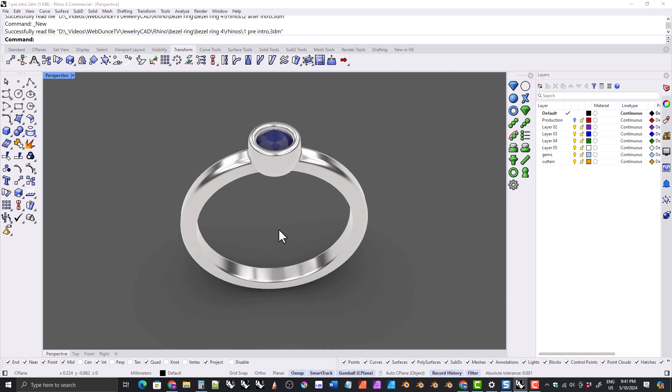Hi everyone, in this video we'll be making this bezel ring, and we'll also be making the silver material and the sapphire material. Now I'm using Rhino 8 in this video, but if you have an earlier version of Rhino like Rhino 7 or Rhino 6 even, I think you should still be able to follow along with the tutorial. There might be some small differences, maybe the location of a tool or something, but I don't think there's anything that would be significant enough to keep you from being able to follow along with the tutorial.

We'll start off by creating a new file, and we'll use the small objects millimeters template. Before we start modeling, I just want to say that we will be making this ring manually using all standard Rhino tools, but there are a few times where we could use the jewelry kit that I make. In those cases, I will show you both ways, how to do it with the jewelry kit and how to do it without the jewelry kit.

So the first thing that we're going to make is the sizing circle, and that's one of the steps that we could do with the jewelry kit or without the jewelry kit. And I'll start off by showing you how to do that with the jewelry kit. So if you have the kit installed, just click on the sizing circle icon. You'll get the sizing circle dialog. We're going to use the US system. We're going to make this a size 6. And we'll put the seam at the bottom.

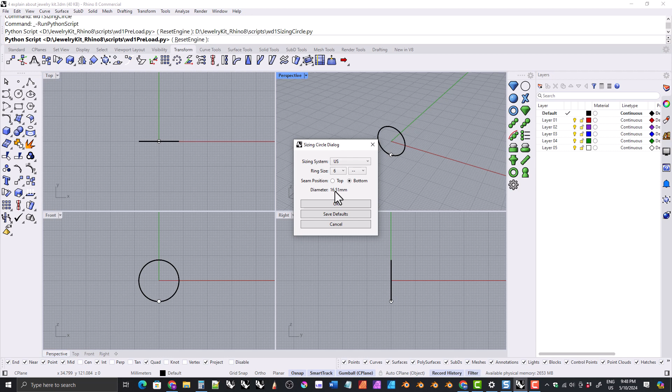Now you can see here that the diameter is 16.51 millimeters. And so we'll be using that diameter when we make this manually. Go ahead and click OK. And that is the sizing circle made with the jewelry kit. Now I'm going to show you how to make the sizing circle manually. So I'm going to go ahead and delete the circle.

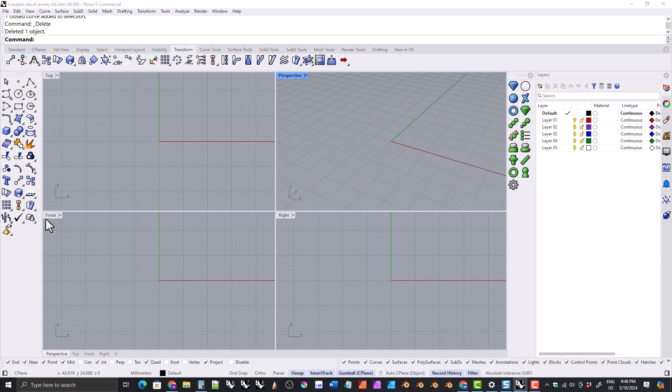And it didn't matter which viewport we were in when we made the sizing circle with the kit, but when we're making it manually, it does matter. So we really need to be in the front viewport. And I just prefer to work with the viewports maximized generally. So I'm going to go ahead and maximize the front viewport. So I'm just going to double click on the little tab here, and that will maximize it.

So we're going to come to the curve tools tab right here, and we're going to grab the circle tool. Now there are several circle tools here, but we want this one. So this one is going to ask for the center of the circle and the radius. So we're going to click on that. Up here it's asking for the center of the circle. That's going to be the center of the world. And so just up here in the command line, I'm just going to type 0 and hit enter. And that establishes the center.

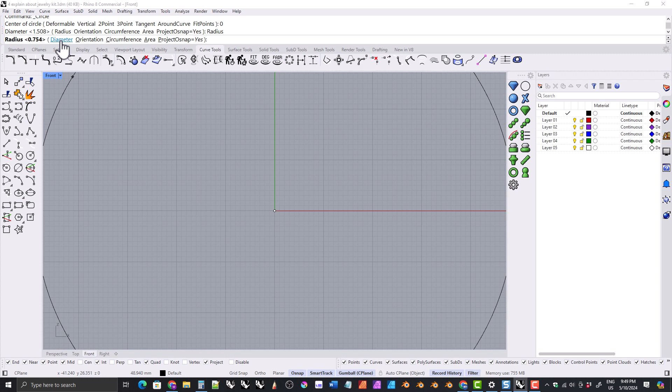The next thing that we want is the diameter. Now it is possible that yours is asking for the radius. You want to be really careful with that when you're making a sizing circle, and make sure that it is set to take the diameter. Otherwise, your circle will be twice as big as it needs to be. So if it says radius here, go ahead and click on diameter. The diameter, like we said earlier, is going to be 16.51 millimeters. So type that in and press enter.

And then we need to move the curve seam to the bottom. So the way we made the circle here, the curve seam is going to be on the right quad right here. And you can see that if you select the circle and then turn on the show curve ends tool here. And you can see this is where the circle starts and ends. Okay, so we just need to move it down to the bottom. There's a couple of different ways we could do that. This time what we're going to do is just rotate the circle in this direction.

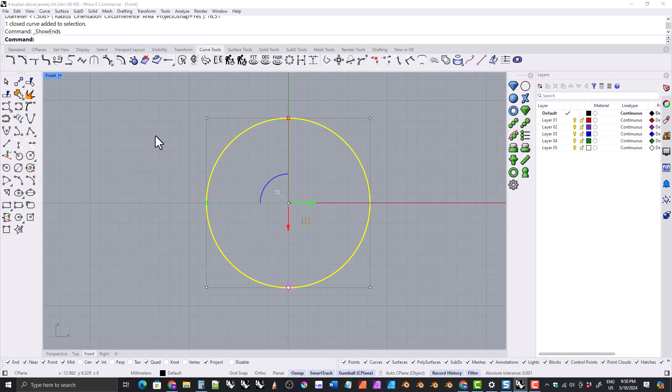So we're going to click on this little rotation handle here. And you can see that the arrows are pointing in this direction, but we want to move in the opposite direction. Because of that, we need to enter a negative number. So we want to move 90 degrees in this direction. We'll have to put in negative 90. So type negative 90 and hit enter. And you can see that now the curve seam is at the bottom. And I'm going to go ahead and close out the end analysis dialog box here. Okay, so we have the sizing circle. The next thing we need to do is import the gemstone.

Okay, so importing the gemstone is another step that we could do with the jewelry kit, or we could do it manually. So I'm going to start off by showing you how to do it with the jewelry kit. So we're just going to click on the gem loader icon right here, and we'll get the gem dialog box. We can leave the type set to fancy and the shape set to round.

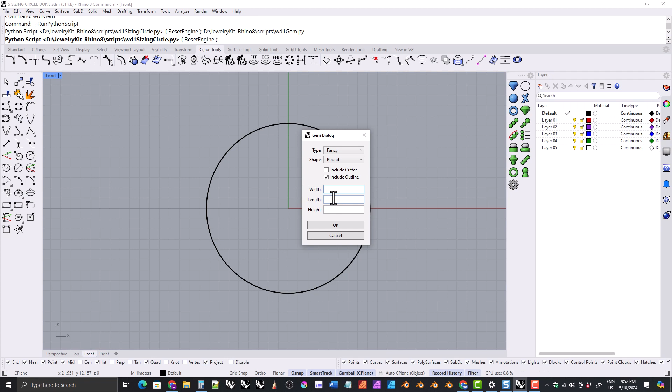We don't need the cutter, so we'll go ahead and remove the check mark from that. We do want the outline, so we'll leave that there. And then we want the diameter to be 3.5 millimeters. So we're going to type 3.5 and click OK. And you can see that it has brought in a gemstone with a diameter of 3.5 millimeters, and it has

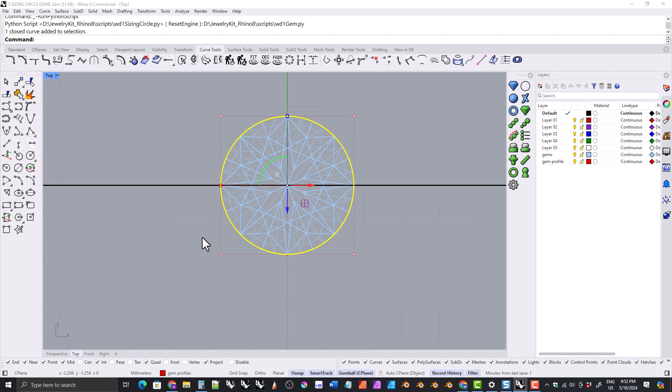the outline right here. So if we look at that from the top view here, it might be better. You can see we've got a circle that is the same size or diameter as the gemstone. Okay, so that is how you bring in the gemstone using the jewelry kit, and now I'll show you how to do that manually. Now the first thing that I'm going to do is delete the gemstone that we made with the jewelry kit.

And in order to bring a gemstone into Rhino, you'll need to have a gemstone on your computer. So you may already have one, but if you don't, you can get one for free from cgtrader.com.

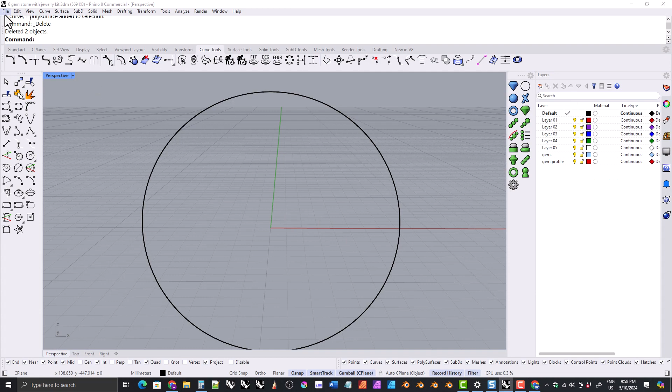And then once that is done downloading, you'll need to go back to Rhino and go to File and Import. And then you'll need to navigate to wherever that file is on your computer. So if you downloaded it from cgtrader.com, it's probably going to be in your downloads folder. Just select that file and click on Open.

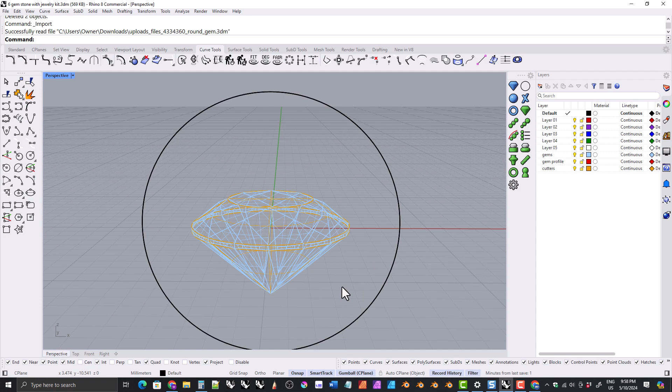Okay, it came in, it has a cutter. So that is this orange object here. It has the same shape as the gem, but it isn't the gem. We don't need that for this project, so you can go ahead and delete it. All right, so we just want the gemstone.

Now the other problem is that it is too big. So if you used a gemstone that you already have on your computer, it could be any size. If you're using this one from cgtrader.com, it's going to be 10 millimeters in diameter. But that's okay. I'll show you how to scale it down to the correct size, no matter what size it is.

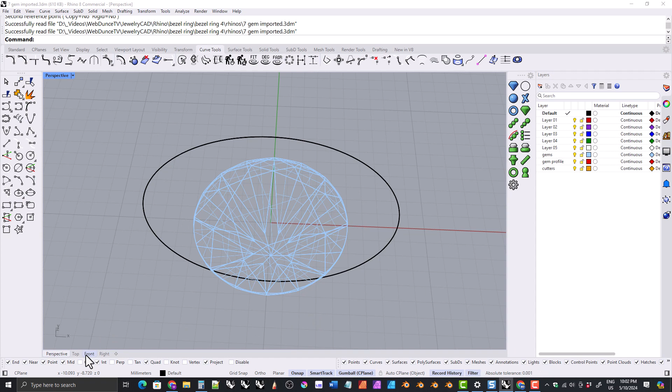Now the first thing that we want to do is go over to the top viewport and just zoom in or out until you have the gemstone pretty much taking up the entire screen, but where you have some space around it. And what we want to do is create a circle in the center of the world that has the diameter that we want.

Before we do that, let's look down here and make sure that we have project activated and that we have our quad snaps and our end snaps activated. Okay, now let's go over here to the circle tool just like before, and we'll press 0 and enter to put it in the center of the world, and then we'll just type 3.5 for the diameter and hit enter.

Okay, now we need to do the actual scaling. Let's go ahead and select the gemstone, come up here to the transform tab, and then click on the scale tool, and our base point is going to be the center of the world. So just go ahead and type 0 and hit enter. Now it's asking for a scale factor or first reference point. In this case, we're going to use reference points.

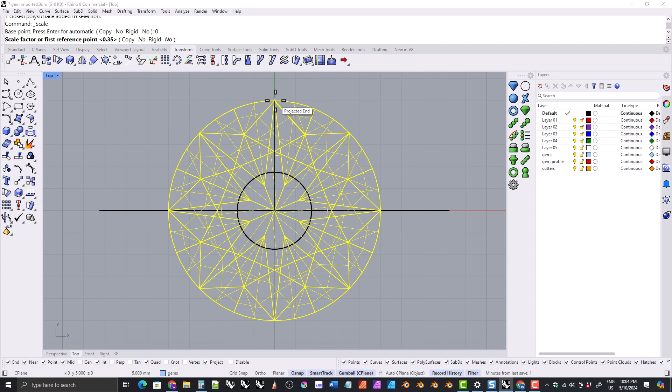Our first reference point is going to be up here at the top of the gemstone. You should get an end snap up there, a projected end snap. So when you get that, go ahead and click your mouse, and then up here in the command line, it's now asking for a second reference point, and that's going to be the top of the circle, the top quad. And there you should get a quad snap. So when you do, go ahead and click your mouse. And now the gemstone is 3.5 millimeters.

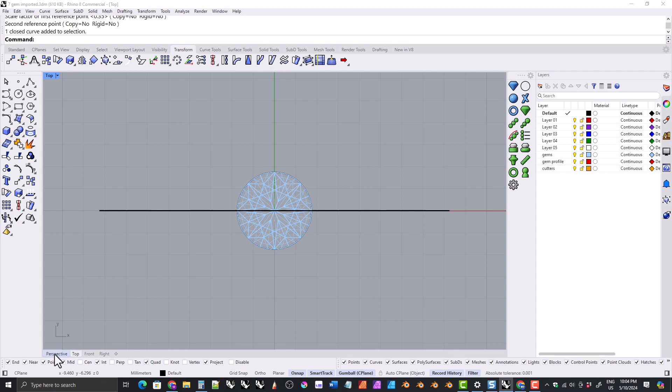And we have that circle, just like we did with the gemstone that we imported in from the kit. Okay, so we've got our gemstone imported, and the next thing we want to do is position it vertically.

Let's go to the front viewport, zoom out a little bit, and box select the gemstone, which will include the circle. What we want to do is, still under transform, grab the move tool, and we want to snap to the top center of the gemstone, then snap to the top quad of the sizing circle.

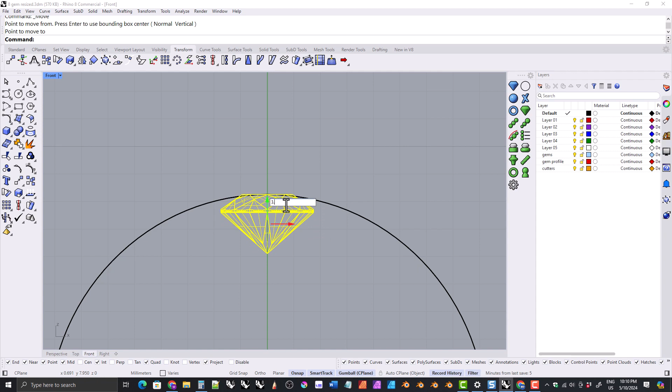Now that we have the top of the gemstone touching the top of the sizing circle, we want to move it up by 3.3 millimeters. So let's click on this up arrow and type 3.3, and hit enter. Now the top of our gemstone is 3.3 millimeters from the top of the finger, or the top of the sizing circle.

Now there's nothing special about me choosing 3.3 millimeters. That was just a design choice on my part.

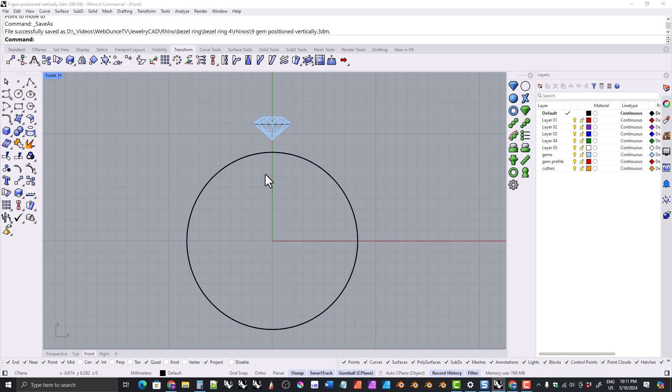Now that we have the gemstone positioned vertically, what we need to do is create the bezel profile or cross-section shape. We're just going to zoom in here, and that shape is going to be on the inside something like this, and on the outside it's going to be kind of an arc.

The first thing I want to do is select this circle. I'm just going to box select like that, which will get that circle, and I want to move that up to the top of the gemstone, so it's just level with the top. This is going to provide a snapping point right here, and this little corner of the gemstone is going to provide another snapping point.

Now I want to make a copy of this circle, so I'm just going to press Control C and Control V, and we're going to drag that copy down until it's just inside the sizing circle like that.

Now I want to scale this circle down so that it's half as big as it currently is. To do that, I'm going to press and hold the Shift key, click on the scale handle here, then type 0.5 and hit enter. Now the circle is half as big as it was, or 50% its original size, and this is going to provide another snapping point for us.

Alright, so these might look like lines, but if we go over to the perspective viewport, you can see that they're circles. Now let's go to the front viewport again, and we're going to create the inside shape of the bezel.

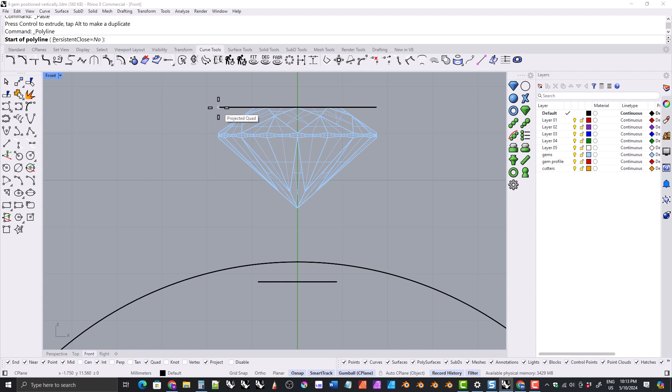To do that, we're going to come back here to the Curve Tools tab and grab the Polyline tool. So we're going to start off by snapping to the left quad of the upper circle, and then snap to the bottom of the girdle on the left side of the gemstone. And then we need to make a little shelf for the gemstone to sit on.

I'm just going to zoom in a little bit. So right along the edge here, you should have your near snaps turned on for this, and just come in maybe about here, and then we will end up by snapping at the left quad of the lower circle. Once we do that, we need to finish the command by hitting enter.

Okay, so this is the inside shape of our bezel, and now we can delete these two circles. Now we need to make the outer shape, which is going to be kind of like an arc.

Now for the bezel wall right here, I want that to be 0.6 millimeters in thickness, and for the bottom down here, I want it to be 0.8 millimeters thick. So I want this to be kind of thin so that the jeweler can hammer that over easily, but I want this to be at least 0.8 millimeters because this is a structural part of the ring.

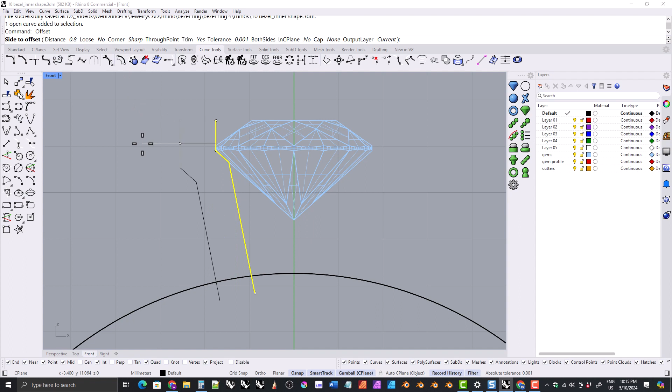Alright, so to help us with that, we're going to offset this curve. We're going to select it, come up to, still under Curve Tools, and grab the Offset Curve tool. For the distance, we're going to type in 0.6 and then click over to the left. And we're going to do that again. I'm just going to hit enter, which will repeat the last command, the Offset Curve command.

For the distance, we're going to type 0.8 and then click over here to the left. So we've offset this twice, once 0.6 millimeters and once 0.8 millimeters. And this is going to give us two snapping points, one right here and one right here.

So now let's grab the arc tool. Now there's a couple of arc tools here, but we want this one. This one is asking for a start point, an end point, and a direction from the start point. So let's go ahead and just click on that.

And the start of our arc will be right here on that first offset. And then our end of our arc will be right here where the second offset intersects the circle. Now you need to have your intersect snap turned on for that. So when you get that intersect snap, just click.

And now we need to choose a direction. And we just want the arc to come out a little past this corner right here, so just about like that. And now we can delete these two offsets.

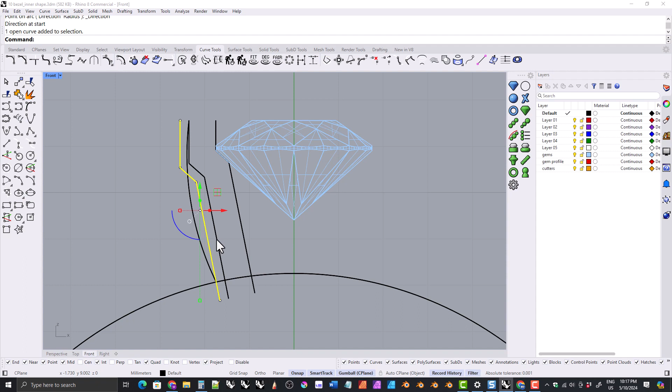Now we do want the bottom of this arc to come past the sizing circle. So let's go ahead and come up here and click on Extend Curve, and then click here at the bottom of this curve, and then just pull down a little bit to extend it, and then click. And we're still in that command, so we can go ahead and hit enter.

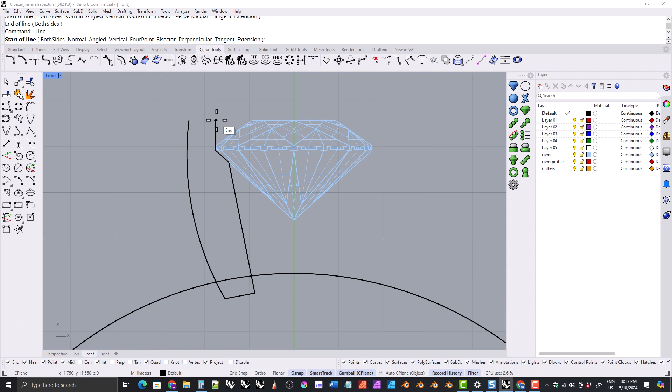So now what we need to do is close off the top and bottom of this shape, and we'll do that with the line tool. So just grab the line tool and we'll snap here to the bottom of this line and here to the bottom of this line. I'm going to repeat that line tool by hitting enter, and then we'll snap here to the two top ends of the bezel shape up here.

Now what we need to do is select all of these lines and then click on join. Alright, so now we have the cross-section shape or profile shape for our bezel. The next thing we need to do is turn this into a solid.

So actually, before we make this into a solid, I want to show you that you can make adjustments to this if you need to. So just click on it. And for instance, some jewelers might prefer to have an angle at the top here, so you could lift this one point up here, or you could pull this point down right here. Some jewelers might prefer it level, like we had it before.

I'm just going to hit Control Z, and some jewelers might like it above the top of the gemstone. So, or if you want to make the arc a little larger, you can. Okay, so you can just make adjustments, and I just wanted you to know that. And now we'll go ahead and turn this into a solid.

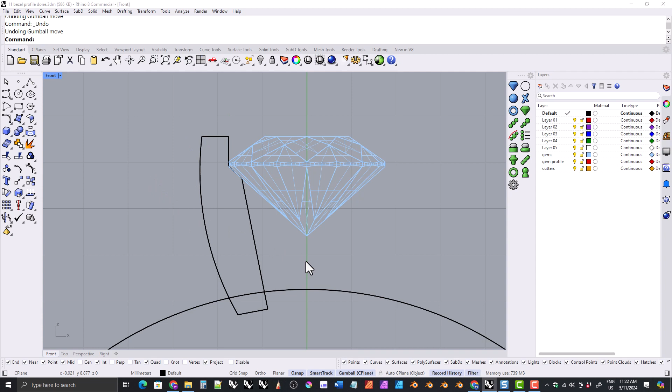Okay, so for this next part, we're going to revolve this shape using the revolve tool. I want to be in the perspective viewport for that, so let's just switch over to the perspective viewport. Okay, and let's click on the Surface Tools tab right here. And here is the revolve tool.

So click on that. It says start of revolve axis. That's going to be the center of the world, so just press 0 and hit enter. Now it says end of revolve axis. Press enter to use C-plane Z-axis direction. So we can just hit enter because the Z axis of the perspective viewport is exactly what we want.

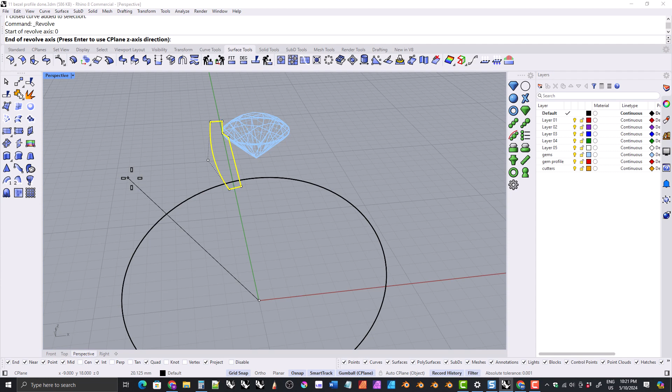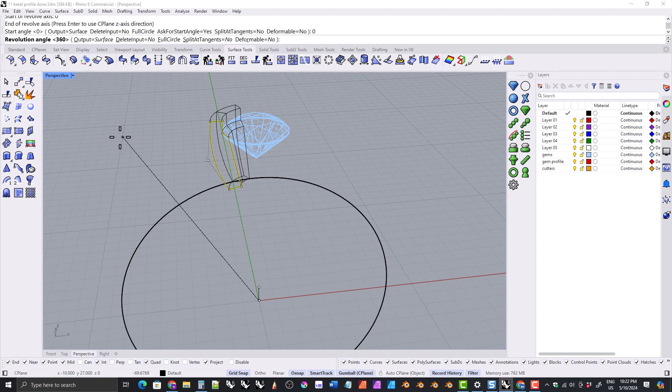So just hit enter. And now it's asking for the start angle. It should say 0 there, and if it does, you can just hit enter. If it doesn't, you would need to type 0 like that. Okay. Next is asking for the revolution angle, which is 360 degrees. And it should say that already there, but if it doesn't, you'll need to type in 360. So if it does, just hit enter, and if it doesn't, just type 360 and then hit enter.

Okay, and let's go ahead and switch to shaded mode here in perspective view so we can see our bezel. So that is our bezel after revolving it.

And what we want to do now, we'll just come over to the front viewport. We want to trim the bottom of the bezel off with the sizing circle. I'm going to go back to the perspective viewport. Alright, so that's what we'll do next. We'll trim the bottom of that bezel off.

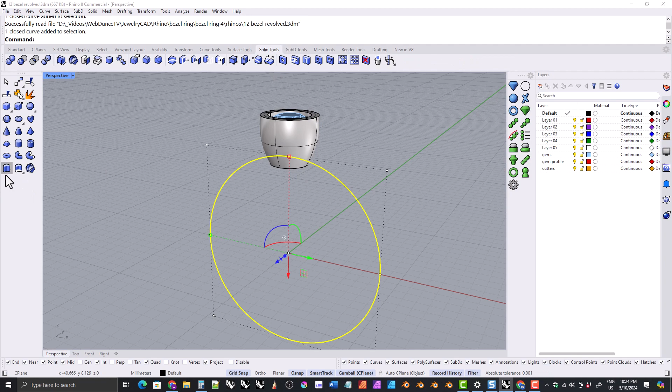So what we want to do now is select the sizing circle and then come up here to the Solid Tools tab, and right here click on the Extrude tool. Make sure that up in the command line both sides is set to yes.

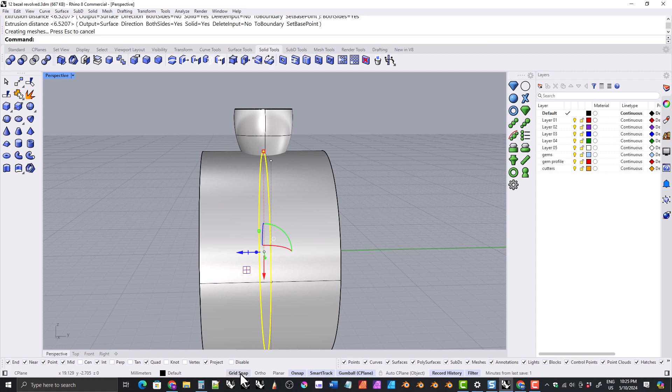So if it's set to no like this, just click on it and set it to yes, so that it will extrude in both directions. And you just want to extrude it so that it is wider than the bezel. It looks like I still have my grid snaps turned on, so let's deactivate those so they don't cause snapping issues.

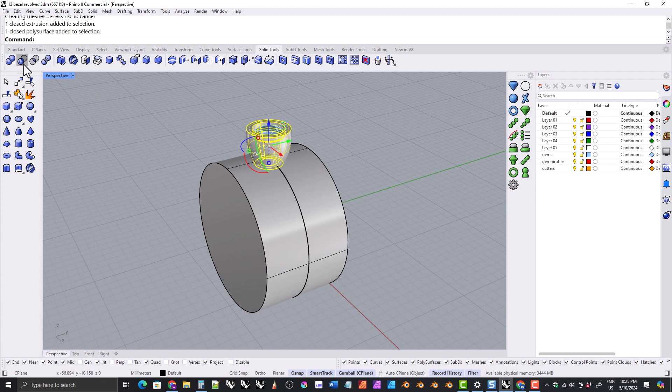Okay, so we've got our cylinder extruded here, and now we want to use that to trim off the bottom of the bezel. Select the bezel, and still under Solid Tools, come over to the Boolean Difference tool, click on that, then select the cylinder and press enter. Click OK on this message. You can see that it has trimmed the bottom of that bezel off so that it is level with the sizing circle.

The next thing we want to do is create the band. To create the band, let's go to the front viewport. I'm just going to zoom out a little bit. Let's select the sizing circle.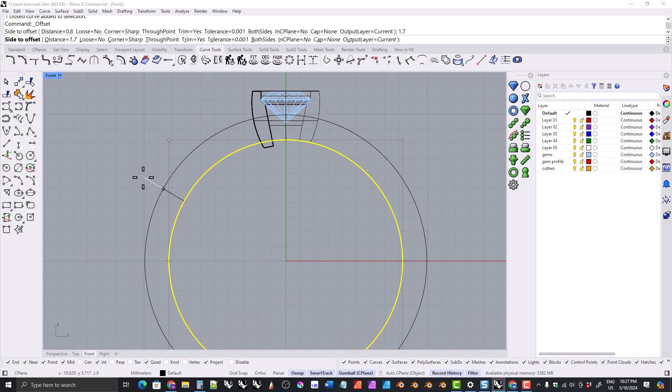Now I want this band to be 1.7 millimeters thick all the way around. So let's come up to the Curve Tools tab and click on the Offset Curve tool right here, type in 1.7 and hit enter. Then make sure that you click outside of the sizing circle. If you come inside, it will offset to the wrong direction. So just make sure your cursor is outside the sizing circle and click. Okay, so now we've got our sizing circle offset by 1.7 millimeters.

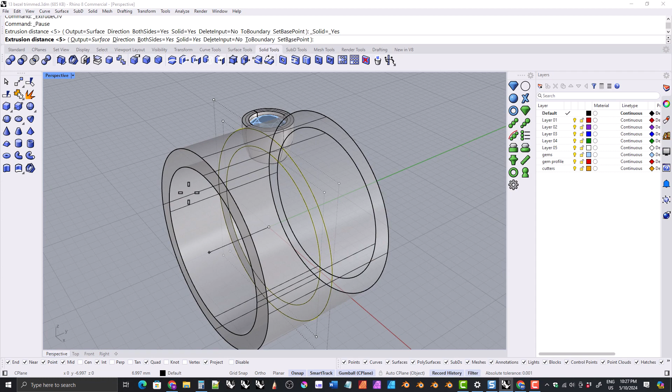Let's select that and go back to perspective view, go to the Solid Tools tab, and grab the Extrude tool again. This time we're going to enter a distance. We want this band to be 2.2 millimeters wide, so we want to type in an extrusion distance of half that, because we're extruding in both directions. That's why we want our extrusion distance to be half of the width that we want the ring to be. So type 1.1 and hit enter.

And that's going to give us a band that is 2.2 millimeters wide if you were to look at it from the right viewport. I'll just zoom in on that right here. So you can see this is 2 millimeters, and it goes a little past that on each side, so it's 2.2 millimeters wide.

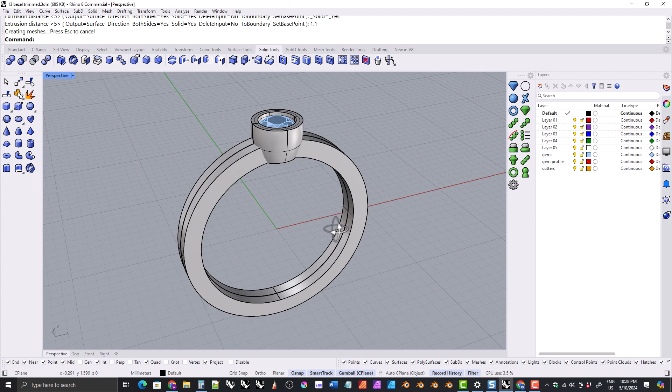Okay, we've got our band, but there's a problem in that it goes all the way through the bezel. What we want is for it to be okay to go in a little bit, but we don't want it to go all the way through. So the next thing we're going to do, if we look at it from the front view, is remove this part of the band that goes through the bezel.

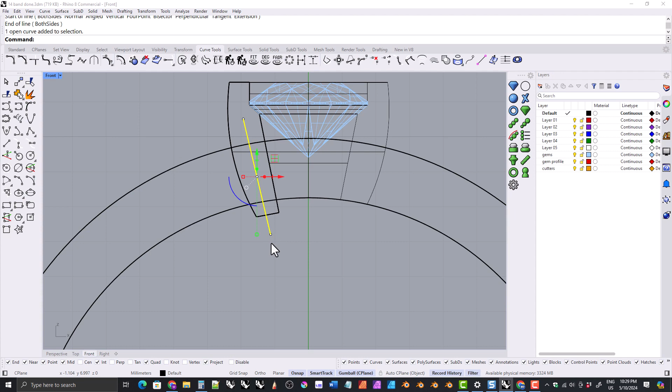So let's come up to the Curve Tools tab and grab the Line tool, and we're just going to draw a line right here, kind of through the center of the bezel cross-section shape. Draw a line like that, then select this line, go to the perspective viewport, and let's hide the bezel. Click on the bezel, click on visibility, and click on hide. Then let's select that line again right there.

Now let's go to Surface Tools and click on Revolve. The start of the revolve axis is going to be the center of the world, so press 0 and hit enter. For the end of the revolve axis, we're just going to hit enter again, and then you should be able to hit enter twice to finish out that shape.

Okay, so now let's click on this cone here that we've made. You can see that the top and bottom are open. We need to cap those off. So let's come to the Solid Tools tab and click on the Cap Planar Holes tool right here.

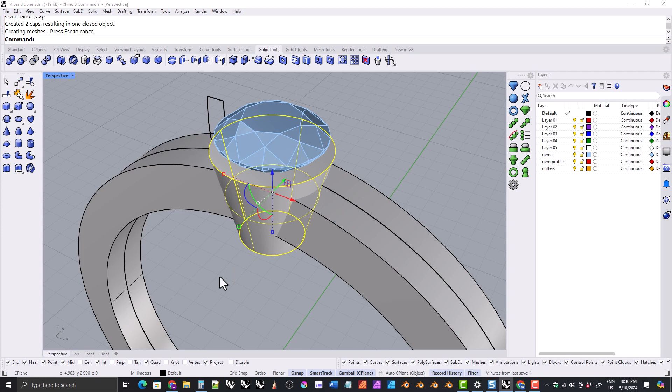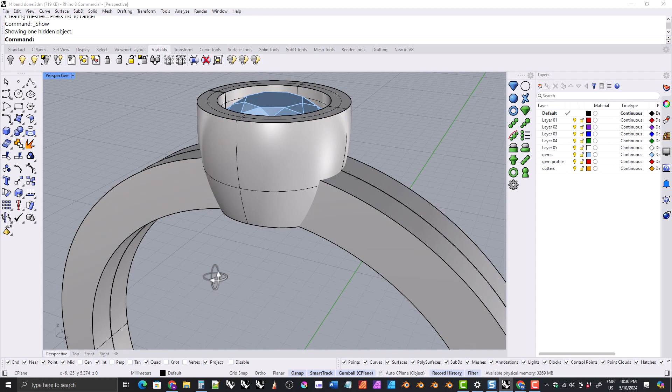Click OK, and then we'll use this shape to cut out that little bit of the top of this band. Select the band, click on Boolean Difference, then click on this cone shape here and hit enter. Click OK, and you can see it's removed that part right there. We'll come up to visibility and click on show, and it will bring our bezel back. You can see that the band goes a little bit inside the bezel, but it doesn't go all the way through.

So the only thing left to do now is to weld the band to the bezel. So select the band, hold down Shift and select the bezel. Go to Solid Tools and click on Boolean Union. And that will go ahead and weld those together.

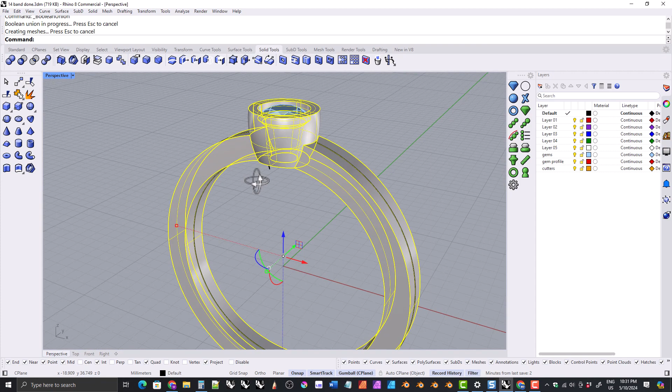The next thing we want to do is fillet or bevel the edges. So first I want to put some fairly large fillets or bevels on the outer edge of the band here. So under Solid Tools, we're going to click on the Fillet tool right here. And for the next radius, just click on that. We're going to type 0.7 and hit enter.

Now we need to select the edges that we want to fillet, and that's going to be this edge and this edge and this edge and this edge. Now these are going to go down to the midpoint down here at the bottom. So those are the 4 edges that you want to select, and then just hit enter a couple of times and it will go ahead and fillet those for you.

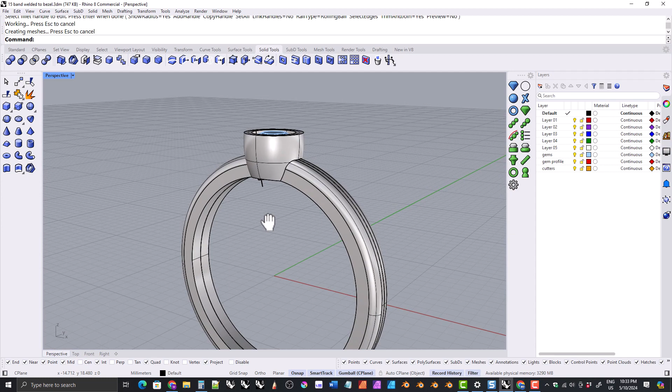Now we want to fillet the inside edges and also this edge right here. Now these are not going to work because when we welded the 2 pieces together, it left a seam right here, and that's going to cause these fillets to fail, but I want to show you that anyway.

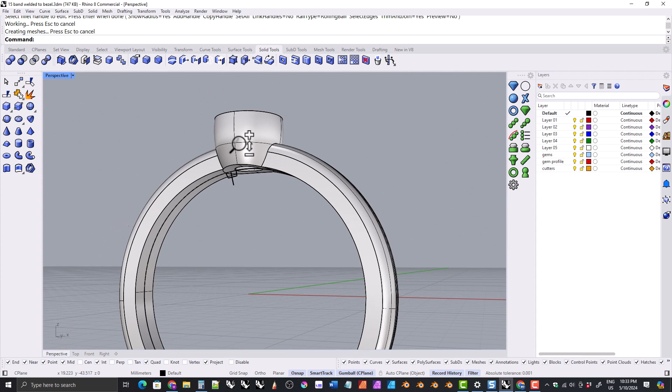So I'm going to click on the Fillet tool again. We're going to set the radius to 0.3, and I'm going to click on this edge of the bezel, and then this edge of the ring, and then we'll do that over here on the other side as well. That edge, and that edge. And then you should be able to just double click on this edge and it should select the edges all the way around. And we can do that here.

Okay, so now we have all of these edges selected. I'm going to hit enter a couple of times. And you can see that it failed just like I said it would. So I'm going to hit Control Z and I'll show you how to get rid of these seams.

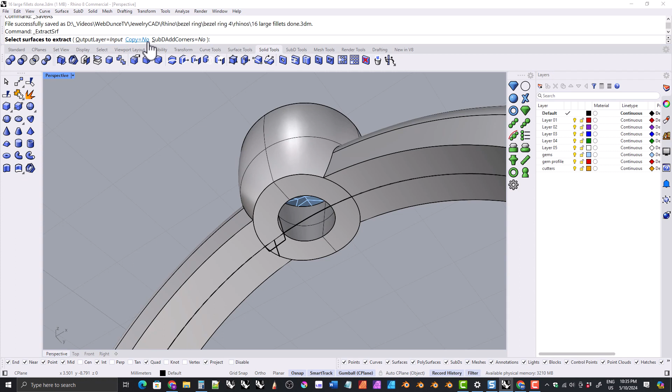So what we want to do is come up here to Solid Tools and click on the Extract Surface tool right here. And we want to make sure that copy is set to no. So if we have copy set to yes, I'll show you what happens. We're going to click on these surfaces. These are the ones we want to extract. When I hit enter, I've just made copies of those surfaces, but the original surfaces are still over here on the ring, which is not what I want. So I'm going to delete those, and we'll do that again.

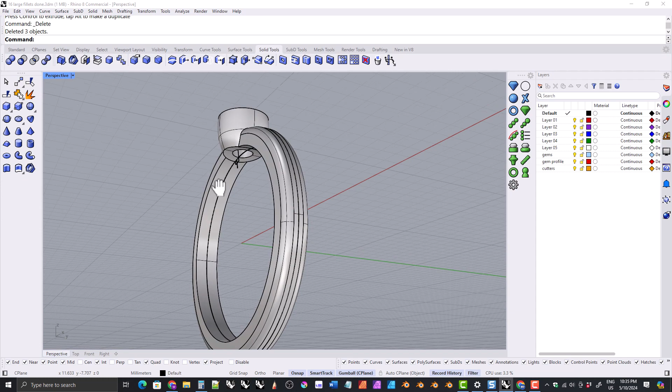We'll select the Extract Surfaces tool here, and we'll make sure that copy is set to no. And then we'll select this surface, and this surface. Okay, we'll hit enter, and then delete. And that will remove those surfaces from the ring.

Now we're going to select the sizing circle. And still under Solid Tools, we're going to grab the Extrude tool and just extrude it in both directions. And just make sure that you go out past the widest part of the ring here. So something like that.

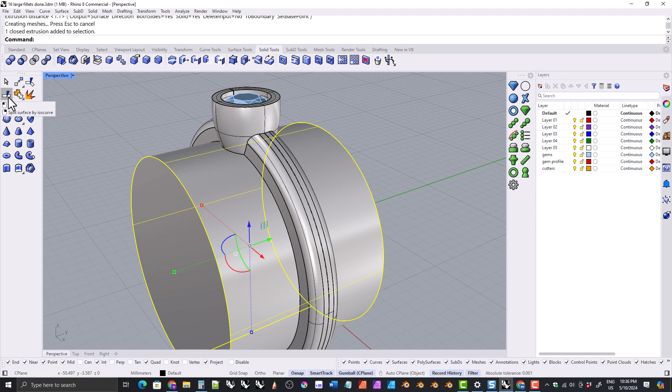Now select the cylinder here, and then over here we want to click on Split. So I think that's this one, yeah. So click on this icon right here, and then click on the ring and hit enter. And then click OK, and we want to remove the parts that we don't want. So basically the cylinder was cut by this ring,

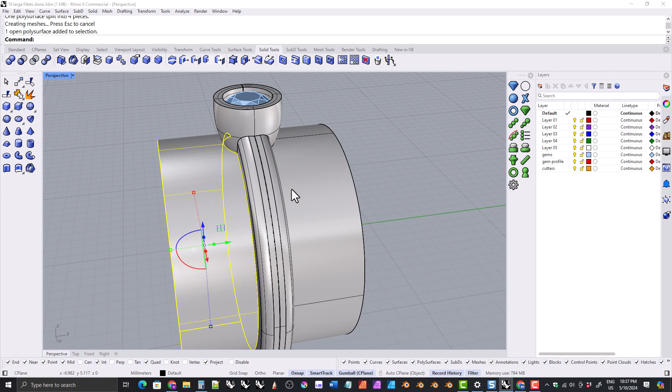and now we need to get rid of the parts that we don't want. So we're going to click here and delete, click here and delete, and then we'll also click on this little circle here and delete that. So now we have this piece right here that doesn't have those seams, and we will select that and the ring, and we'll join that together, and you should get a closed polysurface.

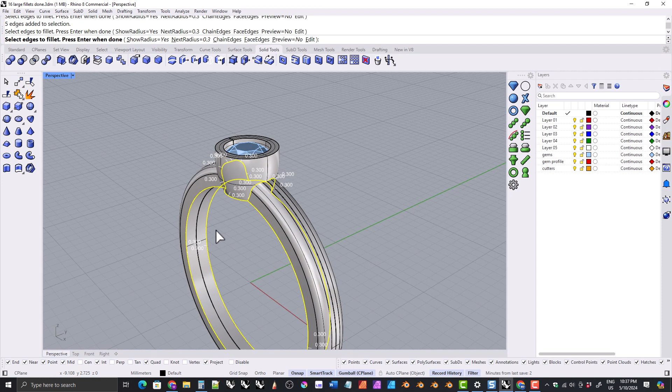Okay, and now we should be able to make these fillets like we were trying to do earlier. So I'm going to click on the fillet tool, and I'm just going to select this edge and this edge and this edge, and I'll select these over here. I'll double click on this one and double click on this one, and then hit enter a couple of times. And you can see that this time it worked just fine.

I also want to fillet this edge in here. I'll give it a little bit of a smaller one, so I'll type 0.2, and we'll just select this edge right here and hit enter a couple of times, and there we go.

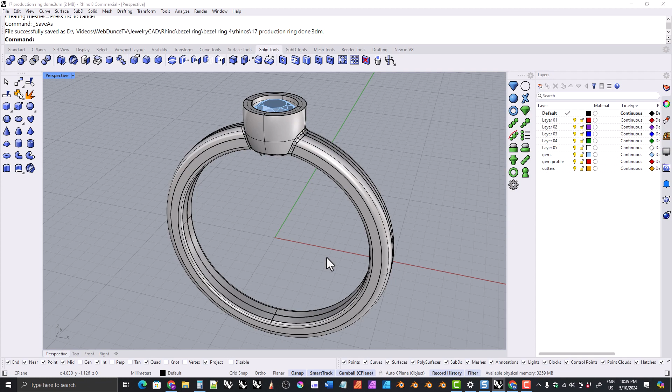So now we have our ring done. This ring is ready for production, and what we want to do next is work on a version of this ring for rendering. So this is the ring that you would send to the printer and make a print of, and then hand the print off to the jeweler for them to actually produce the ring.

And what we can do with this, we don't want to get rid of this, we want to save this. You could save it in a separate file. What I'm going to do is put it on a separate layer. So I'm going to select the ring, and then I'm going to right click on one of these layers. It doesn't matter which one. I'm going to right click on the red one and click on Copy Objects to Layer.

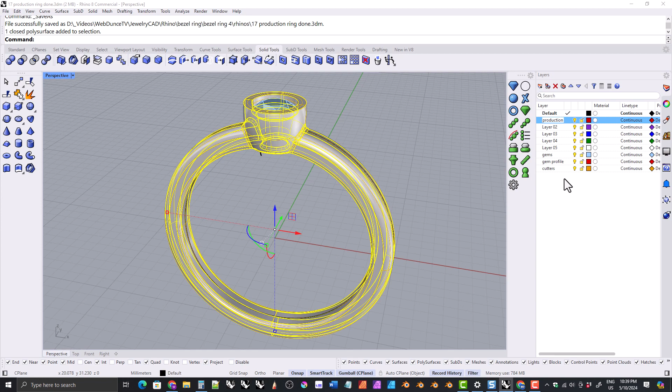So when I click on that, it's going to make a copy of this object and then put that copy on the red layer. So I'm going to go ahead and do that, and I'm going to rename the red layer. I'm just going to click on it, and then I'm going to rename it Production. Okay, and so we'll put this one that's still on the default layer on the purple layer, and I'll call the purple layer Render. So I'm going to right click on that, and with that ring selected, I'm going to click on Change Object Layer, and we'll rename this Render.

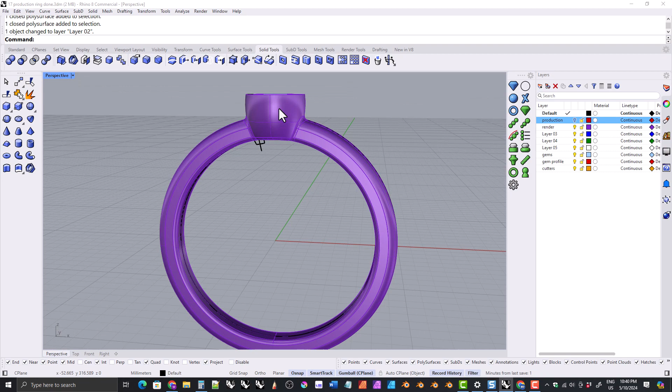So now when we click on this, there is one on the red layer and one on the purple layer. We want to hide the one on the red layer so that we don't change anything about it, and we'll just work on the one here on the purple layer. Okay, so what we want to do is just make the top of this a little shorter and round it off. So if we come into the front viewport here, I'm going to select the ring and the gemstone, and we're going to come up here to visibility and click on isolate so that these are the only objects on the screen.

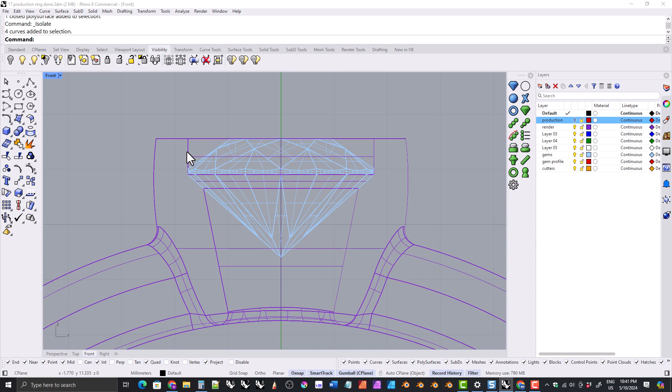I'm going to come to the front viewport here just so I can show you what we're going to do. Basically, I want to lower this. I don't want this to be quite as tall. So when the jeweler is done working on this, this is going to be a little bit shorter and rounded off. Now the jeweler is also probably going to hammer it over a little bit, so it might come over the edge of the gemstone a little bit. We're not going to worry about that, but we're just going to make this a little bit shorter.

I'm going to come to Curve Tools, click on the Line tool here, and I'm just going to draw a straight line. So I'm going to click here, hold down Shift, and pull out to the side, and click here. And you don't have to be in exactly the same place, but somewhere just a little bit above the girdle of the stone here. We're going to select the ring, click on Split, and then click on the line and hit Enter. And then we'll delete this top part here. And then we can delete this line.

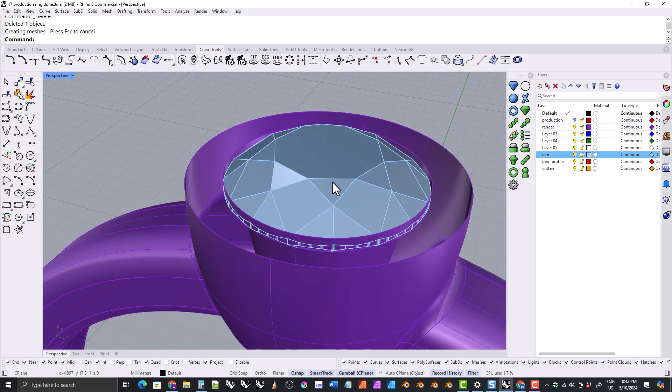I'm going to come into Perspective View, and I'm going to hide that gemstone for a moment here just by turning that layer off. This one came in on the gem layer. If you used the one that I gave you from CG Trader, it will be on a gems layer. If you used the jewelry kit, it will be on the gems layer. But if you used your own model, it's probably on the default layer. In that case, you could select it, go to visibility and hide. But I'm just going to turn this layer off, okay?

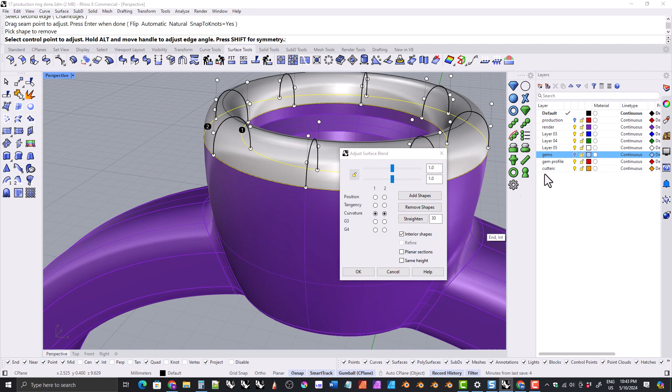Now what I want to do is come to Surface Tools and then Blend Surface, and we're just going to click on this inner edge here and then this outer edge, and then I'm going to hit Enter. I think now I will bring the gemstone back so I can have that to go by. We're going to set both of the continuity types here to curvature. So for point 1 and for point 2, we want it set to curvature. And I think we will lock these two handles together right here, and then just make that a little bit shorter, so something like that, and then click OK. Okay, so we have this kind of nice rounded surface here.

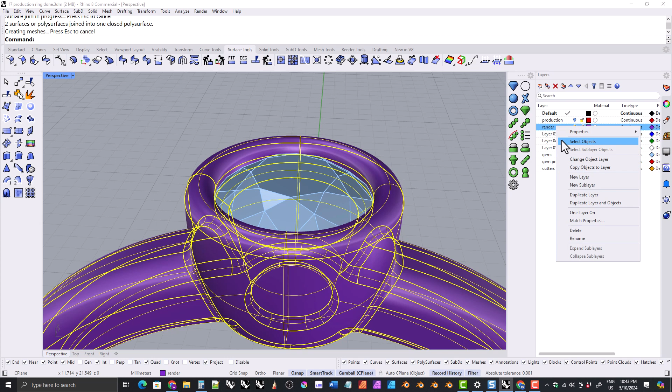We'll click on that, select the ring, and join those together, and click OK. Now if it ends up on the default layer, you can just select it, right click on Render, and click on Change Object Layer again to put it back on the render layer.

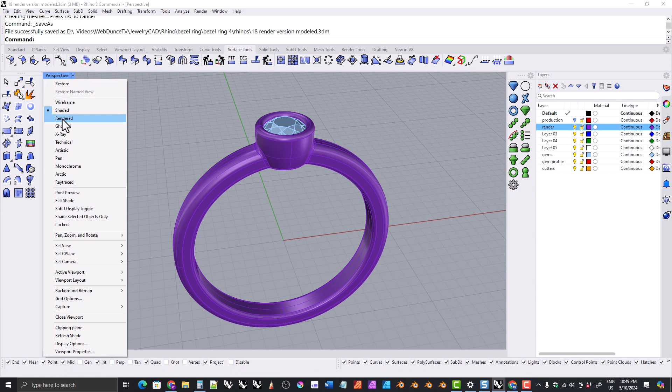Okay, so we have it ready to render as far as how it looks, but now we need to create the materials, the silver material for the ring and the sapphire material for the gemstone. Okay, so the materials, that's something else that we could do with the kit, and we can do it without the kit. So first, I'm going to show you how to do it with the kit in case you have the kit. And let's switch over to rendered mode before we do that. And you can see everything is this kind of plain white color right now.

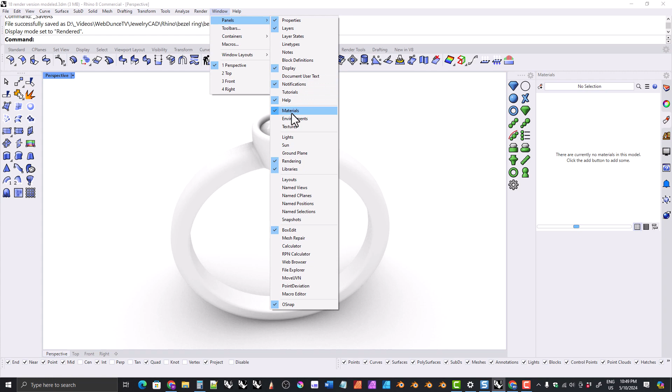Alright, so if you have the kit, first let's click on the material tab here, which looks like a little paint tube. If you don't have that, then come up here to Window, Panels, and Materials. Go ahead and activate that. Now it might come in as a free floating window. If it does, you can just drag it over here to the tabs.

I think you need to drag it by the tab, okay? So if you drag it by the title bar, it might try to dock like a toolbar. So you want to drag it by the tab, and then you can put it over here in the tabs of your side panel. So this is the Materials tab, and now we're going to click on the material loader right here in the kit, and we'll bring in the metal material first. So I'm going to select metals and click OK, and then I'm going to choose the polished white metal.

Now you may see something a little different here. This is the newest version of the kit. I haven't released it quite yet. I'm waiting on an update in Rhino 8 before I release this, so you might see a file name instead. So it'll still be the polished white metal, but it won't look quite as nice as this.

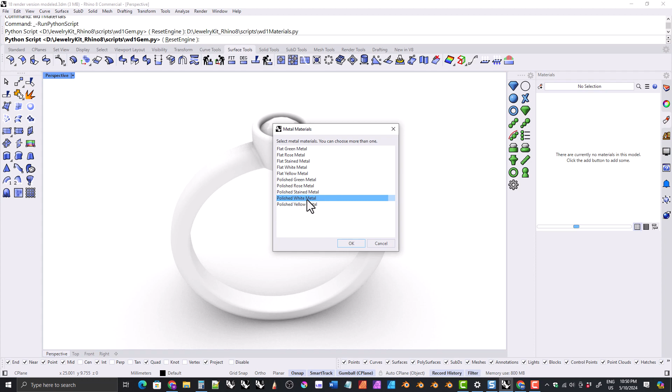Okay, so I'm going to select that, click OK, and you can see it's brought that metal material into our materials panel here. And we can just drag that over onto the ring now. Now sometimes in Rhino 8, for some reason, I have to drag it 2 or 3 times before it actually brings the material over.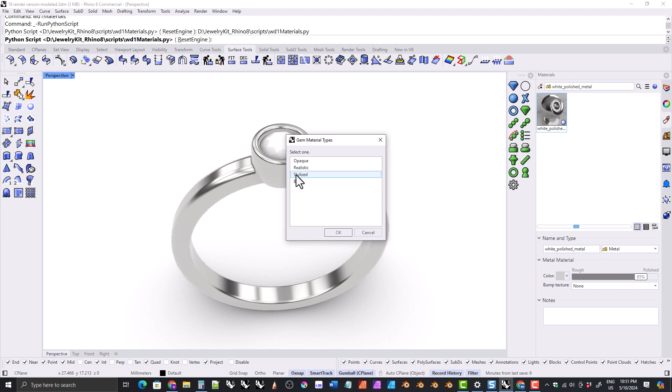Okay, we'll just click on this again, and this time we'll go to gems, and we'll click on stylized. You think you would click on realistic, but really you generally are going to want stylized. And then we'll choose sapphire, and we'll drag that over onto the gemstone. Now I will show you the realistic one as well. And we'll get the sapphire material for that.

So when we drag the realistic material over onto the sapphire, you can see it turned clear. That's because the realistic materials are meant to be used in ray trace mode. So they are more realistic, but they only work in ray trace mode. Otherwise, they're almost completely clear. Okay, ray trace mode is difficult. It's hard on my computer, so I don't typically like to use that. It's for ray trace mode, the realistic materials, and also for actual renders, okay? But we don't need to actually render the ring right now.

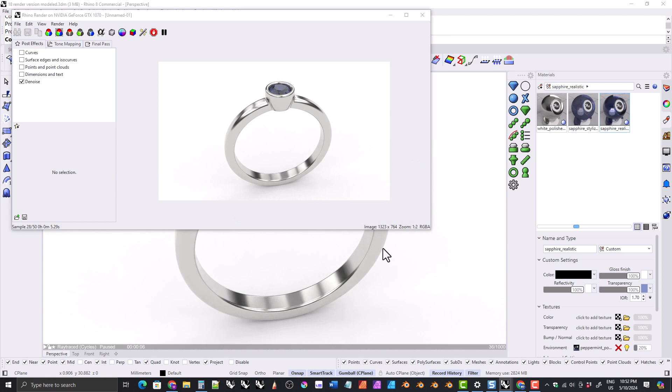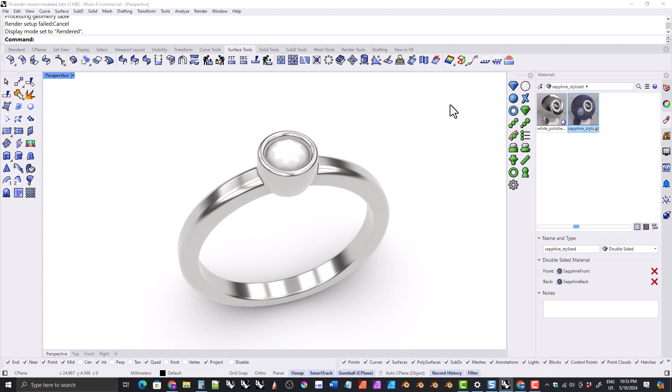Okay, so I'm gonna go ahead and delete the realistic material here. And you can see it has removed it from the gemstone. And we'll switch back over to rendered. And I'll put the stylized material back here. Okay. Now you can see the bezel a little bit. It's protruding into the stone.

So the materials that come with my kit for Rhino 7 and for Rhino 8, you cannot see through. You can see into the stone, but you can't see through the stone. But if something protrudes into the stone, you can see that. Now Rhino 6 doesn't have that capability, so if you have my kit for Rhino 6, you will be able to see through the stone as well.

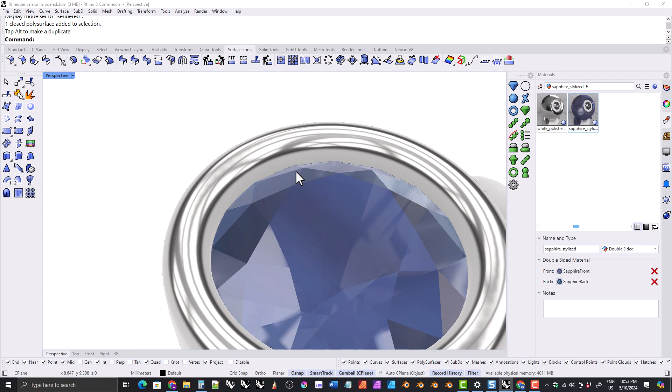Okay, so all we're going to do is just lift this up a very little bit. I'm going to come into the front viewport and just lift that up a little bit and see if that helps. Okay, and it looks like that fixed it for us. There's maybe a little bit going on here with the edge of the stone, so we could fix that by scaling it. So I'm just going to hold down shift and click on the scale handle, and then I'm going to type in like 0.99, and that should pull that away from the edges.

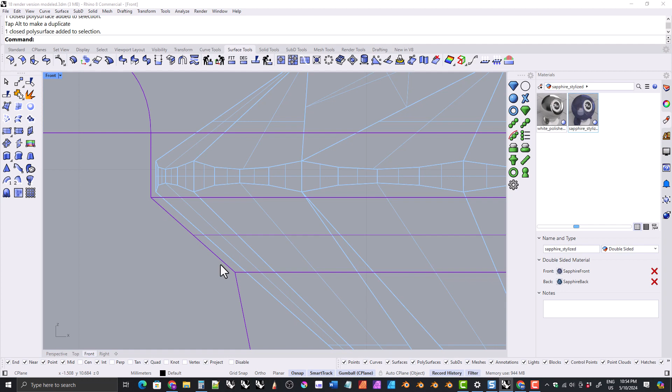So if we go into the front view, you can see there's a little bit of a gap between the edge of the stone and the bezel wall, and also between the stone and the bottom of the bezel right here, that little shelf. Okay, so you only want to do this once you're ready to render the ring. You don't want to do these things while you're busy designing the ring, because when you're designing the ring, you need the gemstone to be accurate in its size.

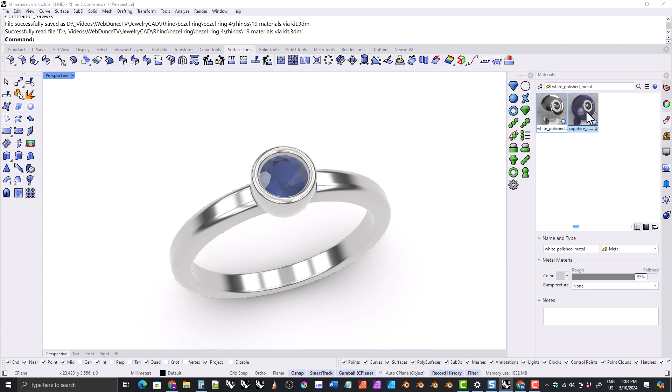Okay, so we have that issue fixed, and again, this is with the kit, and now I'll show you how to create these materials manually without the kit. Okay, so the first thing I'm going to do is delete both of these materials. And let's go ahead and click on the Add Material button right here. And let's click on Metal. So we'll make the silver material first. And you can see by default we get a nice silvery material already. We can just drag that over onto our ring.

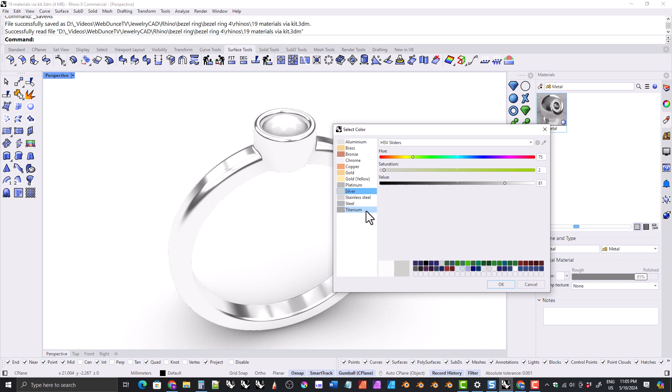Now the color is a little too light. So to fix that, let's come down here to the color box. Just click on that. And over here on the left, you can choose silver. Now, if you have Rhino 7 or Rhino 6, you'll need to change the drop down to custom color list in order to get to the silver color. But in Rhino 8, you can have one of these other color models and also see the custom colors over here. So click on silver and click OK, and you can see that that is just a lot darker than that default material was. Okay, so we're done with the silver material.

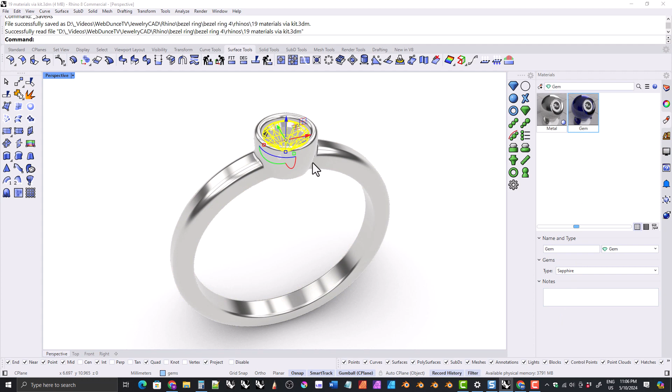Now we'll make the sapphire material. So let's go ahead and click on the Add Material button again. Now there is a gem material, and you could choose that and set that to sapphire, but that's kind of like the realistic material from my kit, and you have to be in raytrace mode to see that. Okay, so that's why we're not choosing a gem material. We're going to go ahead and go with a custom material. So I'm going to switch this back to rendered, and I'm going to delete this material here. So click on add material and click on custom.

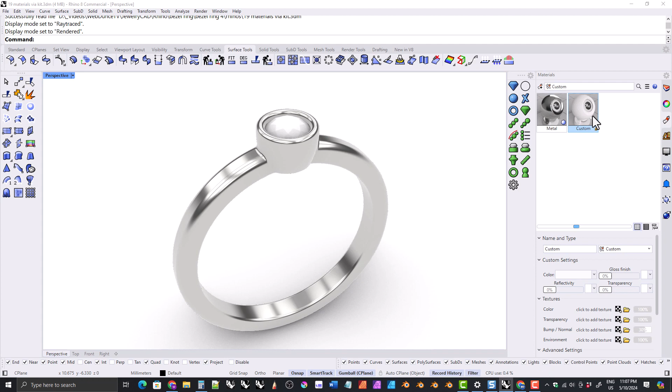Now in my kit I had a double-sided material, and what that means is that there's a material on the outside of the gemstone and then a material on the inside of the gemstone, and this allowed it where you could see into the gemstone but not through the gemstone. That is available since Rhino 7. So if you have my Rhino 6 kit, you'll be able to see slightly through the gemstone, unfortunately. But in Rhino 7 and Rhino 8, I have that double-sided material, so you can see into the gemstone but not through it. But we're not going to get that complicated with the material that we're going to make manually, okay? So we're just going to create a single-sided material, and that's this custom material here.

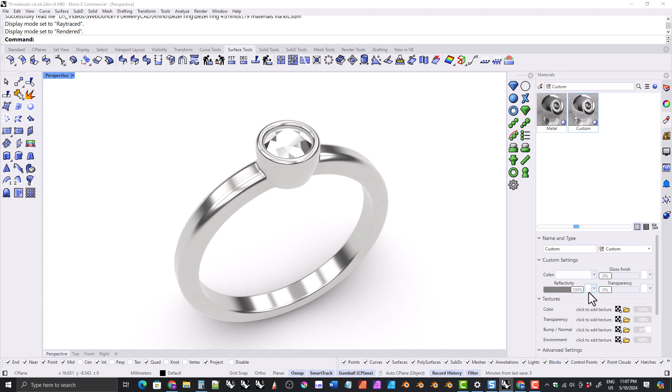Let's go ahead and drag this over onto the gem. Now it doesn't look any different. Let's go ahead and change the reflectivity. We'll just bump that up to 100. You can see now it is a little different. Looks like it's made out of metal. And let's change the reflectivity color here. Click on that. Set the model to the HSV sliders, hue, saturation, and value, and change the hue to 240 and the saturation to maybe 55. And let's change the value to 50.

Okay, and that already looks pretty good, but what we're going to do is add a little bit of transparency to it. So let's just double click here on transparency and let's set that to maybe 7%, and that just lets us see into it a little bit. Okay, all right, so I think that looks pretty good.

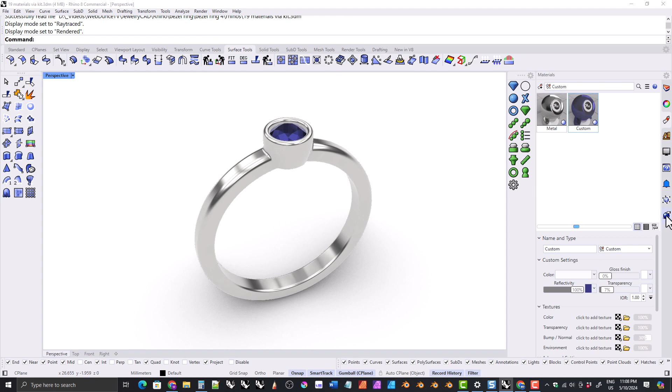And one other thing you could do if you want, you could come over here to the rendering tab. If you don't have that, you can click on the window panels and activate the rendering tab right here, and you can change the background color. So you could make a gradient, but I'm just going to make the background kind of a darker gray, something like that, just so that it stands out a little bit better. Okay, and that is it. We are done with this ring.